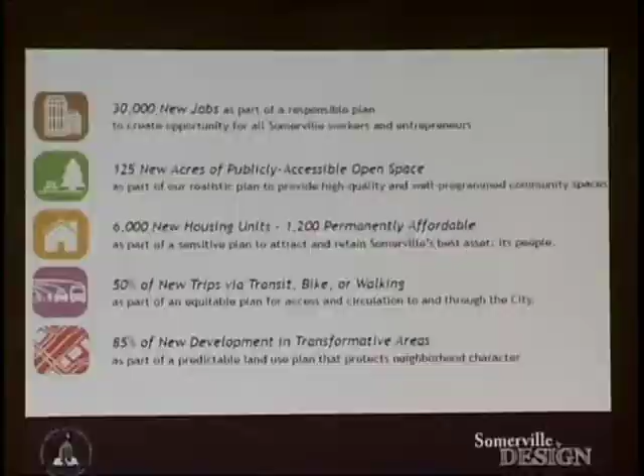And 85% of new development is in the transformative areas like Assembly Square, Inner Belt, Brick Bottom, and Boynton Yards. The rest of it being enhanced in places like Broadway, all while making sure that we limit or end the strategy of squeezing infill development in amongst two-family houses in a way that is probably inconsistent with the neighborhood character.

All of this strategy is something we're working towards submitting in a citywide zoning overhaul, the draft of which will be released this fall. But in addition to that, that draft is based on a lot of the current mapping strategies and the current design strategies.

As we do these neighborhood plans, we learn and we improve that draft, and we say the community wanted development here but didn't want development there, and we can make some of those changes as we go. So this is designed to be a very interactive process.

We started with the vision meeting, which was September 29th here in this room. Had a pretty good crowd of folks who came out and proposed some suggested ideas for what was important to them. We then moved into 328 Broadway, which is our design studio, a vacant storefront in Winter Hill. Spent 3 days there, held a series of meetings, walked around, toured around the neighborhood with the design team so they could get to know what was what.

Parked the art bus out front just because it's fun to do. And now we're working towards providing a plan with the items in it like this Gilman Square plan, public feedback, local stories. We get all these pieces together. At the end of the day, it also includes, as I said, that zoning strategy.

Russ, you want to take it from here? So I'm going to hand it over to Russ Preston, who has been our lead designer on this team. He's going to walk you through the rest of this process with the folks here. We're going to have a little introductory piece done by our economic development team, and then move into the designs.

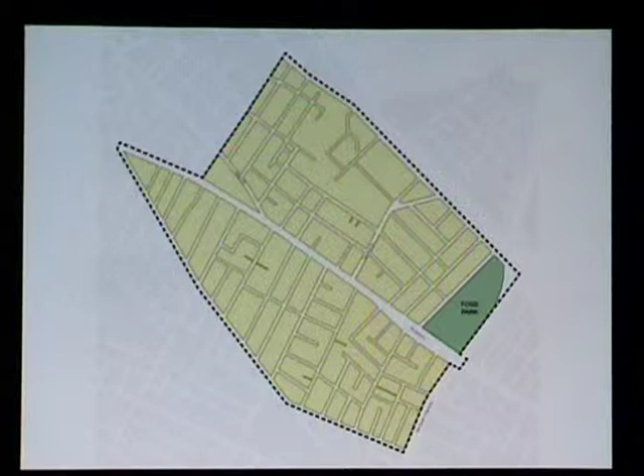Evening, everyone. Thanks for participating in the Winter Hill by Design process here, our design charrette the last couple of days. Big thank you to all the team members too. We've been running around all day trying to get these drawings and ideas out for you. Really appreciate all the last minute effort here to get these boards over and get this presentation together so we can share with you these ideas we've gathered the last couple of days.

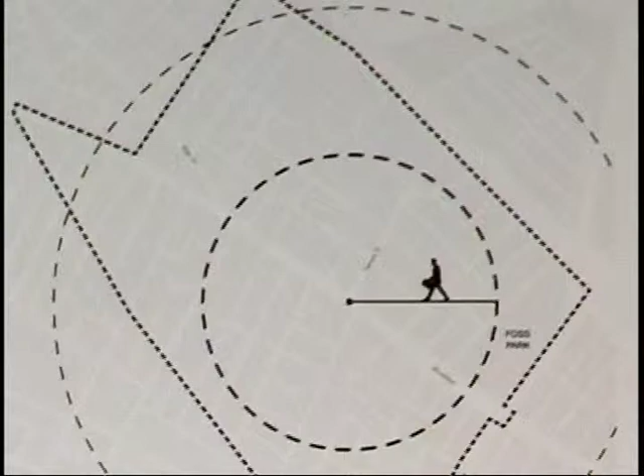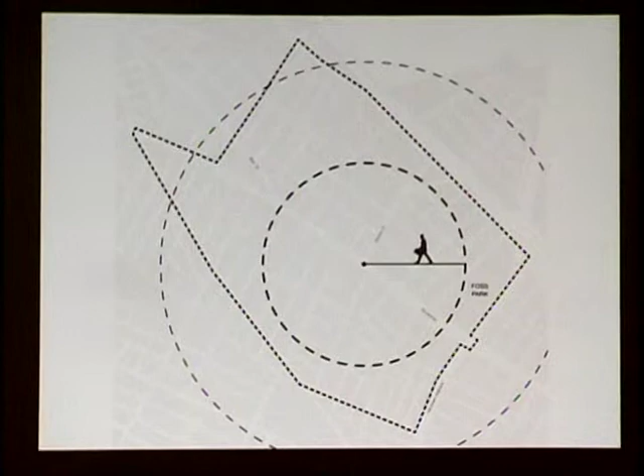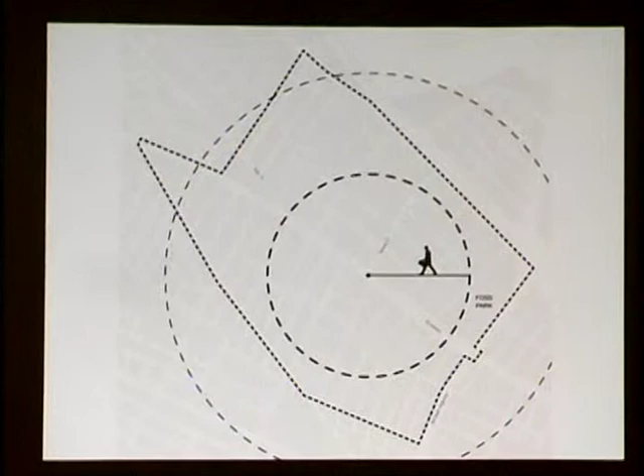So just to orient ourselves, this is Winter Hill at a 5-minute walk. We've kind of put that 5-minute walk at the center, which we heard over the last few days of this process is more or less at Temple and Broadway, the 100% corner. So we'll talk a little bit about that 5-minute walk and what the implications of that are in the neighborhood.

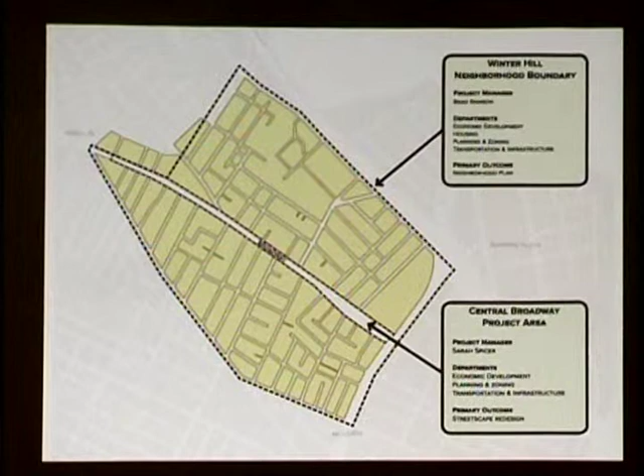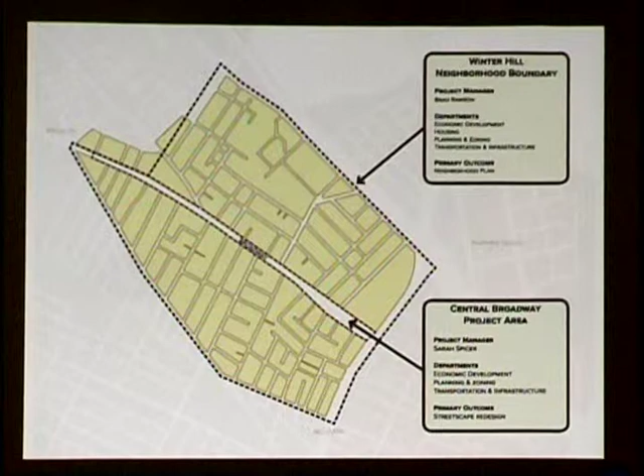So there's two processes running at the same time. This is the neighborhood plan, but there's also the Central Broadway project area. And we've looked at those three concepts over the last few days with the input we were taking in, and have a few ideas that we're going to share now in the context of the neighborhood plan. So I don't want to confuse this, but there are two processes going on that will hopefully inform each other as we move forward.

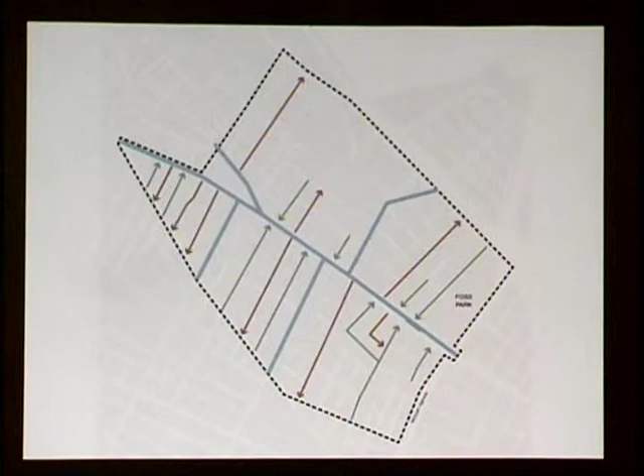So looking at the one-way and two-way street system, it's just to orient ourselves around Broadway. And we know there's a lot of traffic issues around Broadway, a lot of congestion that we've heard over the course of the by design process so far. Broadway's got a lot of one-way streets and a lot of streets coming into it, and that sets up an issue of a lot of turning movements that we can talk about further.

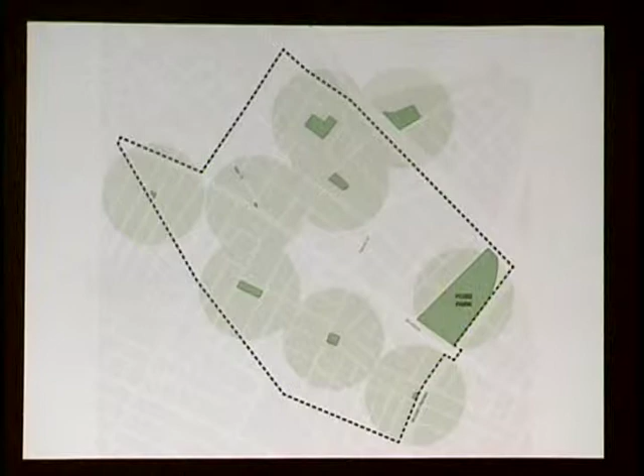What we heard a lot also was that there's a lack of open space in the neighborhood. So this is the existing open space in Winter Hill, Foss Park being kind of the most visible landmark. And we've also found some opportunities for new open space that we can talk about in more detail, most notably a new neighborhood square or green space at the corner of Temple and Broadway, and then some other pocket parks and plazas that might have an opportunity to make it into the neighborhood. You can see that quickly fills in that gap, so we liked where those parks showed up.

So from an economic development standpoint, I want to hand it over to Ed and Glenn to sort of set the stage here about how Winter Hill fits into the larger economy of the metro area.

Thank you, Russ. I'm Ed. This is Glenn. We're with Urban Advisors. One of the things we wanted to mention when we started is that our mission here is really about finding ways to make a much better business environment and make things work better for the residents who are around this area who would like to see more retail and services and a more walkable street.

Okay, I'm technically challenged here. One of the major things that the city has in transforming itself, and a challenge at the same time, is this housing pressure. Anywhere, according to these projections, from 4,400 to 6,500 to 9,000 units, depending on which set of numbers you look at.

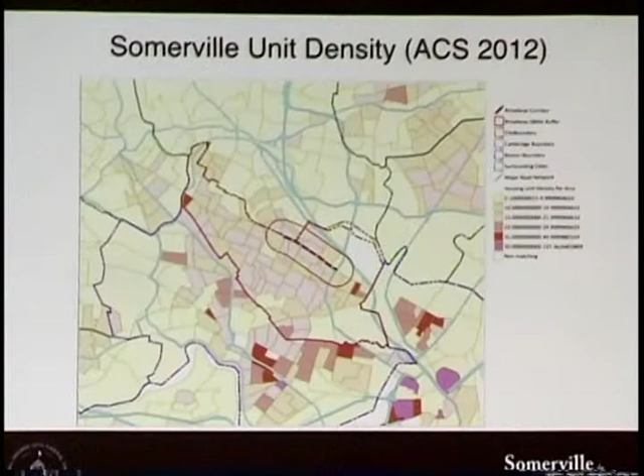You already are kind of dense, and you don't have much in the way of vacancy. So what this means - and there's nothing wrong with your incomes here, they're rising - essentially this means that housing pressure means you're going to have to be careful about where you put that stuff, because you have a neighborhood set of goals that says you're not going to start ruining the character of your neighborhoods to end up with putting in 9,000 units.

And why is that? Well, there are some great dedicated hardworking merchants on Broadway, but at the same time, the area has had a lot of disinvestment, and the retail is scattered, and it's basically not a retail district, as some of the other areas in the city are. It's a traffic pass-through, and it operates that way.

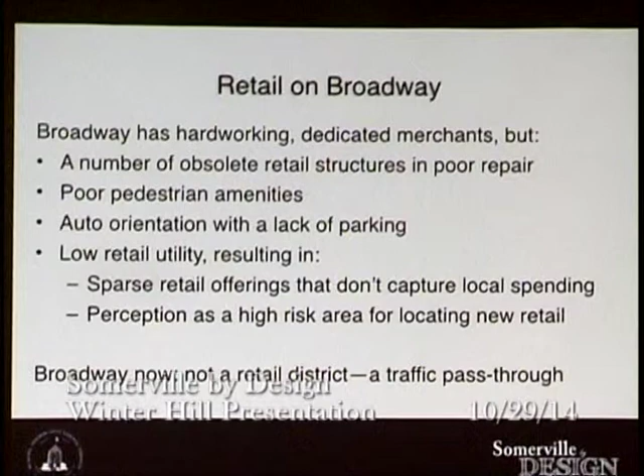So what that means is that when we're talking about a strategy, there are things you can do to help the local businesses, but one of the major things when you have this housing crunch is that you're going to have to find a place to put those units. That means when you look at redevelopment on this strip, you have to maximize the efficiency of land use. And that means you also have to create an urban framework that enables that, and that is what will enable you to lower the risk and the perception of risk for retailers who would like to move there, because the risk is not in the income, it's in the perception of disinvestment.

That residential demand gives the city a lever to get what you want. It's not even a matter of negotiating - the developers want to do the residential, they're crying out to do it here. So you can bargain for the kinds of things that will make your neighborhood better, like the retail space and the affordable housing.

And allowing the developers to have this higher residential intensity means that you're also adding people right on the street there who will be walking around every day on that piece of street. They'll be there at night walking. You'll start filling in those gaps. The appearance of disinvestment will change, and then the perceptions will change, and you will find that retailers will believe that there is a lower risk of them going there.

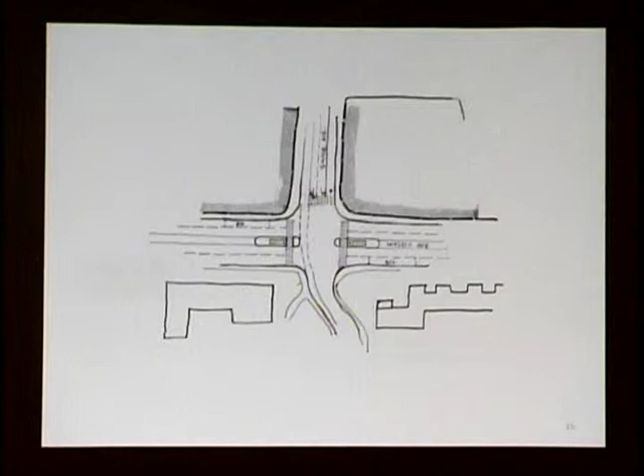So the next issue on Mystic is what do we do with all of this empty space? It's kind of a no man's land, not interesting to walk past. An early idea was, can we somehow buffer the highway with a large wall? How do we actually make the highway not be there, and how does that affect the neighborhood?

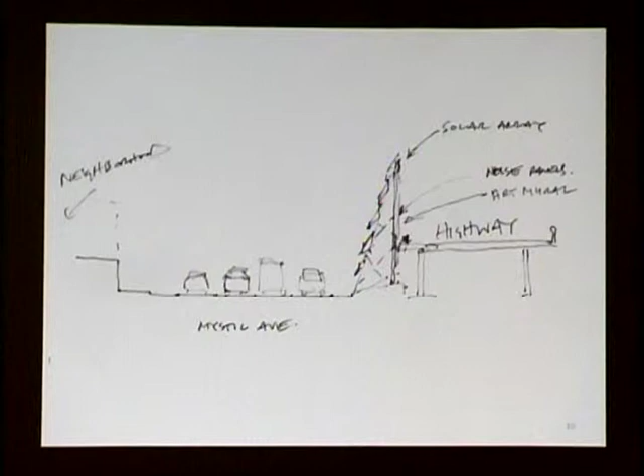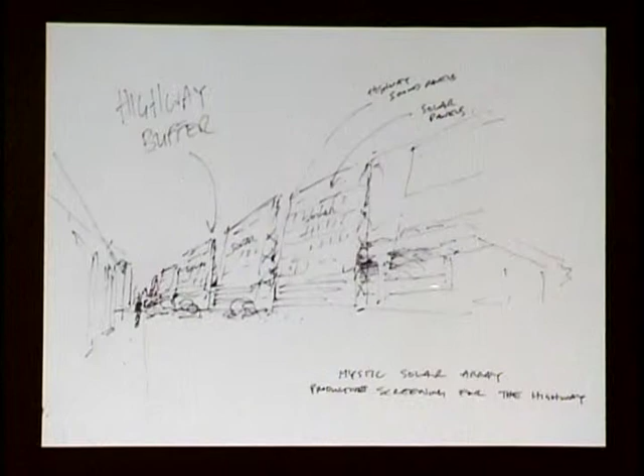A crazy idea was we actually line the wall with solar panels, making it Somerville's largest solar array. This faces south and could power a lot of industrial or fabrication uses that go under the highway. That was a wild idea we want your feedback on.

But getting more into the nuts and bolts of it - coming out from the 93 off ramp onto Mystic, there's a way we could neck this down and make this much more pleasing, slowing cars down so that the back and forth of pedestrians is improved. And then also, what happens underneath the highway?

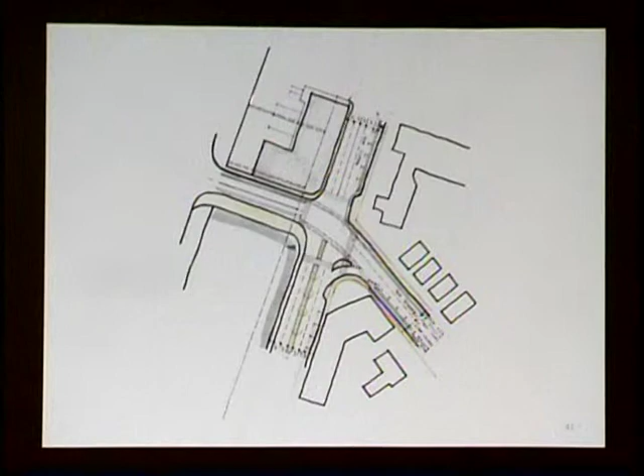This is showing a sort of Butler building, a warehouse type building under the trestles of the overpass, with loading and parking behind, screened from the neighborhood on the north. That will look something like this. You could get a whole lot of fabrication space, sort of overflow space from Artisan Asylum, and this could really become a maker avenue along Mystic under the highway, making this more of a place and less of an auto-dominated area.

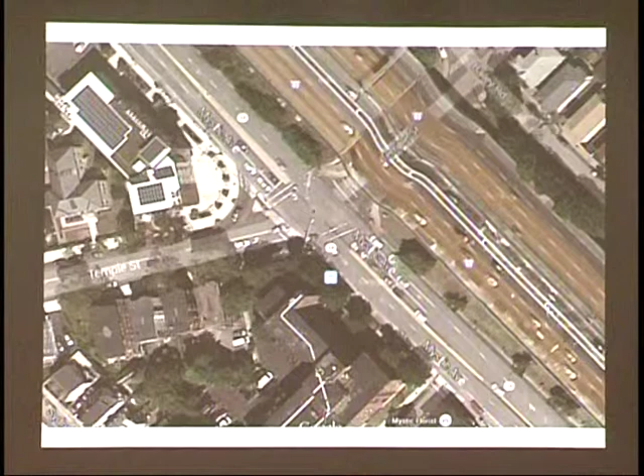Our next study area is Temple Street, moving up the hill. We've talked about this intersection and the connection across, but we wanted to look at Temple Street as a corridor, potentially a bikeway or greenway coming up from Ten Hills and the river into the neighborhood. This is it today - it has some large travel lanes, and travel speeds we noticed were higher than normal, so there was some potential there.

Here it is as it comes into Broadway and the 100% corner. Some quick sketches we did showed you could actually fit two bike lanes and two full parking lanes, plus two travel lanes along that, so we could bring in bicycle facilities very easily within the existing curb to curb.

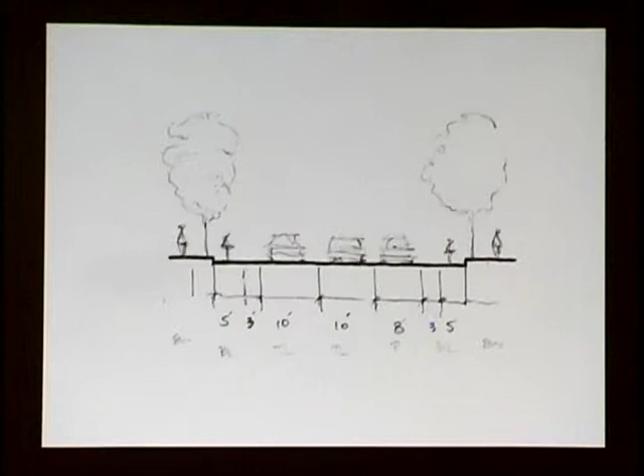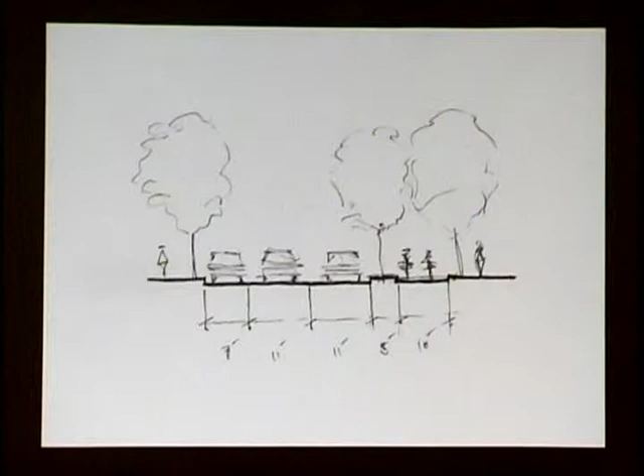This is another version of that with a turning lane in the center. And then a third version which puts a cycle track on one side - a two-way cycle track, protected - that would come down the whole street here.

Another thing we noticed is there's a lot of opportunity here to celebrate this church with a new public space. On the open space map, this was a location to really enhance this area and slow the cars down along this turn. You can see the bicycle facilities come in, and we've enlarged this plaza in front of the church, making it more inviting for pedestrians to come in and enjoy.

So moving back around the neighborhood to Foss Park, sort of the other connection to Mystic up to Broadway.

You've seen the images, this park has evolved over time, and there's been a lot of discussion about what needs to happen there. Our recommendation is that this needs to be further studied—what's the programming, what are the activities and uses that go there. But early on we've got a lot of consensus about where the fields are located, and how Broadway meets the park, and how this edge interacts with McGrath Highway. So we've looked at those to kind of kickstart the thinking around what happens to Foss Park.

A big move here I want to point out right away is this connection across to the supermarket area, really strengthening that intersection for pedestrians. We've also moved some of the sports facilities down and put an amphitheater that can berm up along the highway, plus other facilities programming farmers markets, community gardens, and the like.

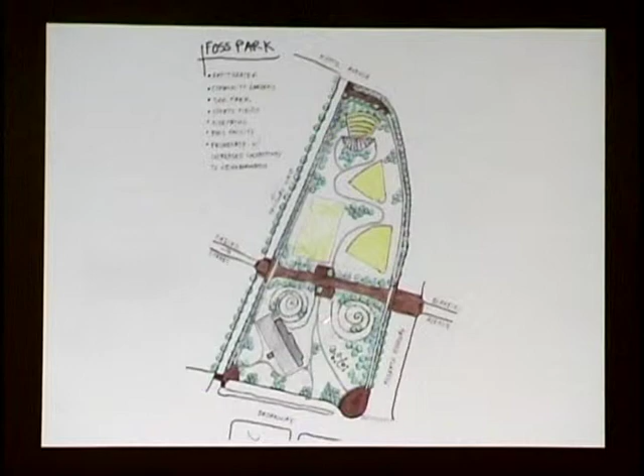Another alternative is really berming up along the highway to shield the noise, air quality, and increase the overall friendliness of the park, pulling that down along the edge of McGrath. This opens up the opportunity for a much larger amphitheater, performance-type place, soccer field, and possibly putting the pond back into the park. That pushes the ball fields and other sports facilities, tennis courts and basketball courts, down closer to the pool.

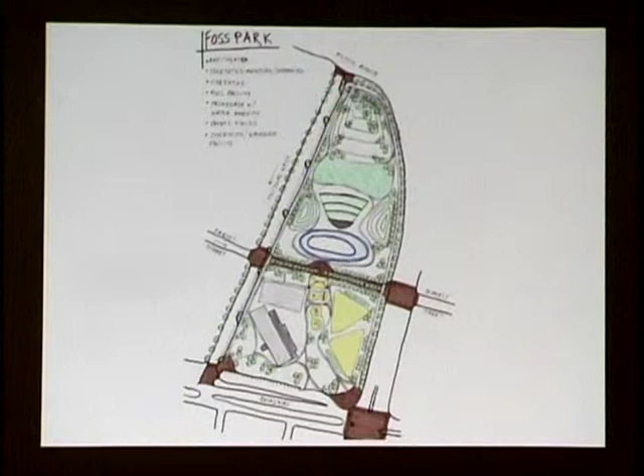So this brings us to the edge of Broadway, and this intersection is really a mess right now. There's a lot of leftover pavement, a lot of leftover pedestrian space that's not being programmed—it's all empty space that's just there. And then this parking facility, we thought, okay, is there a better way we can organize all of this land?

So we looked at building on it, programming it with new buildings. This could be a new YMCA, a new mixed-use building, really creating a gateway into Winter Hill that meets Foss Park, improving the connection from the park over to the neighborhood. And this is a redevelopment here, mixed use as well.

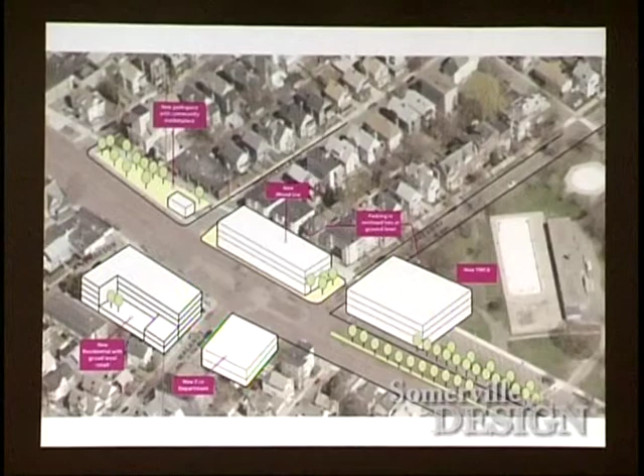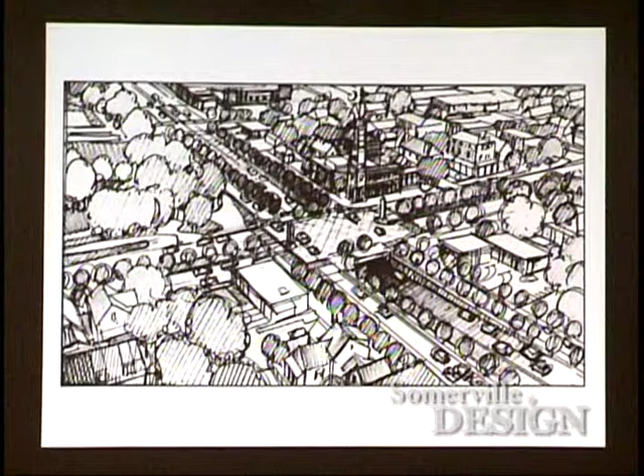Further details here: there's an interesting corridor connection to McGrath, and this whole line of boulevard—what do we do with that? We looked at a couple different versions. An idea that came up when we were planning East Somerville was actually trenching out McGrath, pushing it down, and then pulling across Broadway with a deck on top of McGrath. This would create a gateway plaza for local traffic on Broadway and getting onto McGrath, really tying the two neighborhoods together and making access to Foss Park and over to East Somerville's Main Street and the grocery store area much easier. So we want to reintroduce that idea here because we think it would really benefit East Somerville.

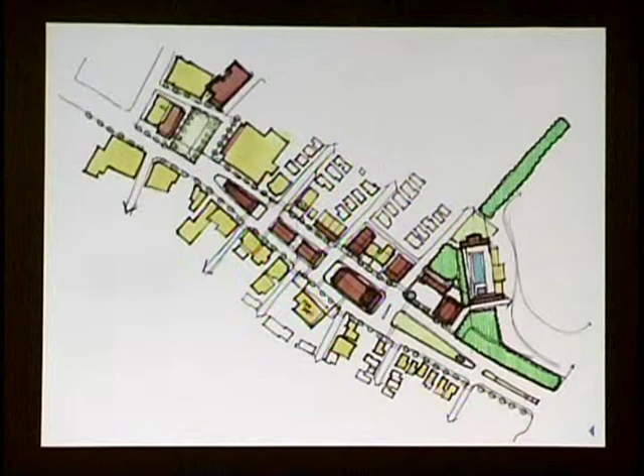On the more radical side of the plan, we thought, building on these redevelopment areas that might happen on the corner of the park, could we use some of this land in the wide section of Broadway to create more development pads or more public building facilities such as market buildings? So that's pulling this up and creating really a two-sided street—two-sided blocks, one way in this direction and one way in that direction. That would allow cars to travel slower and really extend that Main Street feel in Broadway in Winter Hill.

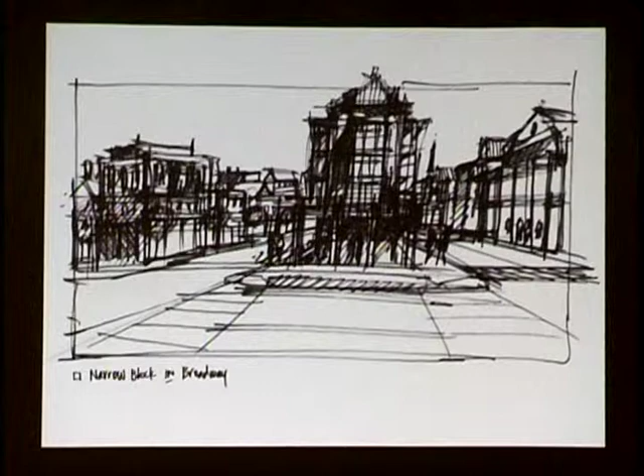This is another version of that in more detail, and we can talk more about the architecture ideas here if you'd like. This is a very quick sketch representing a flat iron building in the center of Broadway, with Broadway going up the hill and down the hill on each side.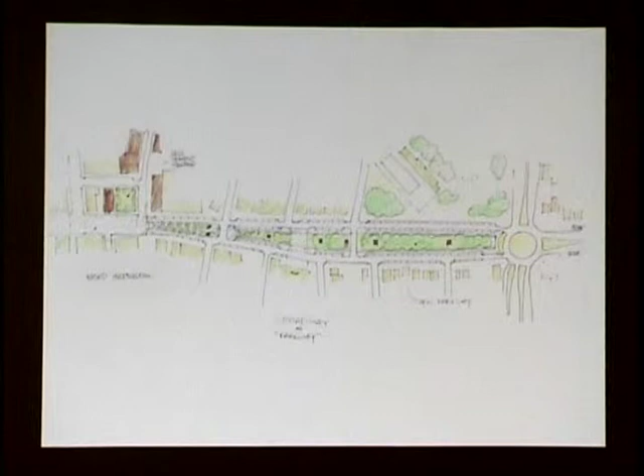So this is another iteration of that YMCA building with several other development sites, and this is sort of a pared down version of the building in the center of the street. And then another iteration of a field house building with possibly an indoor pool for the YMCA, and then a sort of remnant of that large green space.

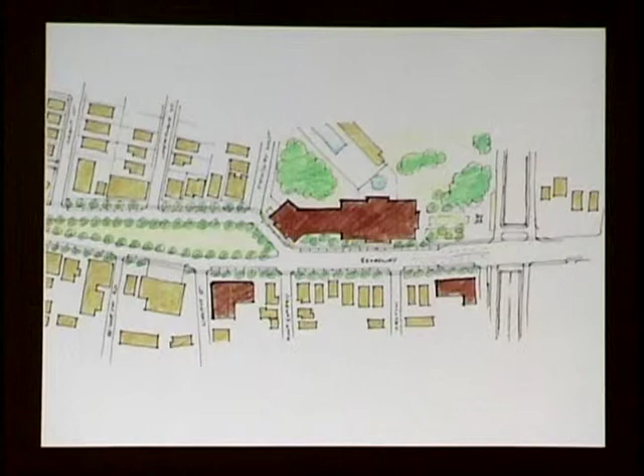And this is just necking down. This would still be 4 lanes, turning lanes, bike lanes, and parking, so there's still quite a bit of right-of-way in this version. And this is an alternative where we've actually shifted that building in the street to all of the sort of leftover islands and parking area in front of those existing homes and businesses. So this could be a really nice mixed-use sort of outdoor seating, sort of promenade leading into the park.

So concept 2 has been the preferred design coming out of the process to date for the streetscape. And there's really 3 sections to this design: west of the main Broadway intersection, Broadway to sort of Temple Street, and then down towards Temple to McGrath. Those are the 3 sort of chunks that we've explored.

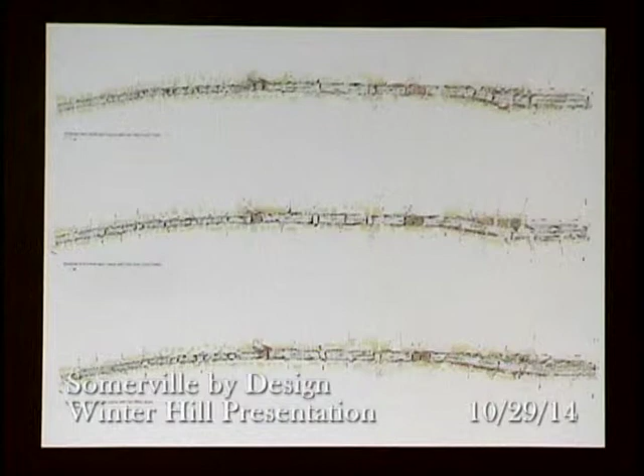But a few things I want to point out. Looking at the report that came along with those studies, there's a couple of quotes. All of them have the same amount of space for automobiles, and we just wanted to bring that back up and question that assumption. Should we have less space for automobiles and more space for people? Or on the other side of that coin, should we have more space for automobiles and less space for people?

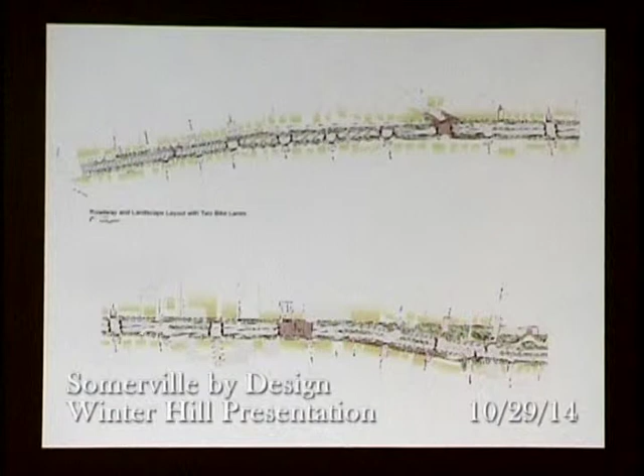And we thought that needs to be discussed in the context of the larger vision for the neighborhood. This is concept 2, which you can see at the intersection of Temple and the intersection of Main there. But really what we started to look at were the details of what happens along Broadway. In this plan, a few things poked out: some of the medians are being taken out, so we're losing trees, and some of the sidewalks we started to question.

So then we dug more into the report, and we discovered that this concept might be the preferred one, but it actually has the narrowest sidewalks for pedestrians. So we thought we needed to revisit that and say, is that really the vision for Winter Hill, or is that in conflict with it?

So this gets us to a more holistic understanding of how the neighborhood functions from a transportation or mobility standpoint. Do we want to prioritize pedestrians, or do we want to have the car be the priority? We should discuss that further with everyone this evening, looking at it from a network approach.

So this is Winter Hill's sort of people-oriented network right now. And you can see in the back of the room later that we have some major thoroughfares for bicycle facilities, and then the sort of minor networks, the more local neighborhood streets that could use minor facility improvements. These are the more sort of commuter corridors for bicycles. And then we've identified the nodes of destinations that bicyclists and walkers might use in this network, tying it back down to the river and to the Assembly Square T line as well.

So we need to think about Broadway's transportation improvements in the whole context of how people get around the neighborhood. And also very important is this Marshall Street connection from a pedestrian standpoint down to the future Gilman Square.

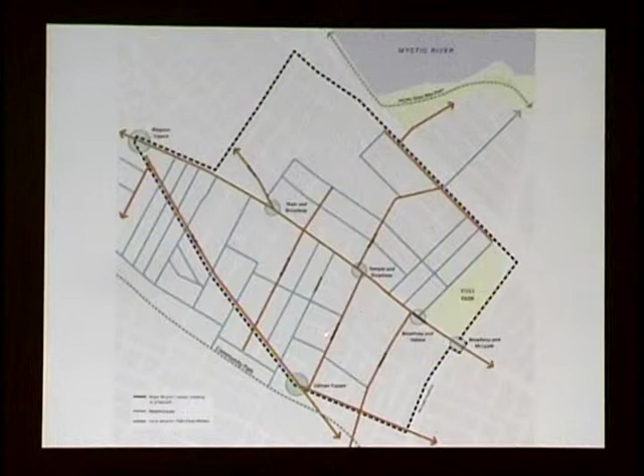That's actually a much quicker walk, and we envision that being a fairly high use area. The character of that street is going to change when the T goes in.

So just some quick background, Andrew, who will talk in a little bit about some short-term interventions, went out and shot some speeds. And surprisingly, the road doesn't perform that bad right now. The highest speed we clocked was only 41 miles per hour. But really, we want to get that number down to around 25 along the whole corridor to make it safe for pedestrians. From studies done on pedestrian fatalities, below 30, below 25, is really what we have to shoot for.

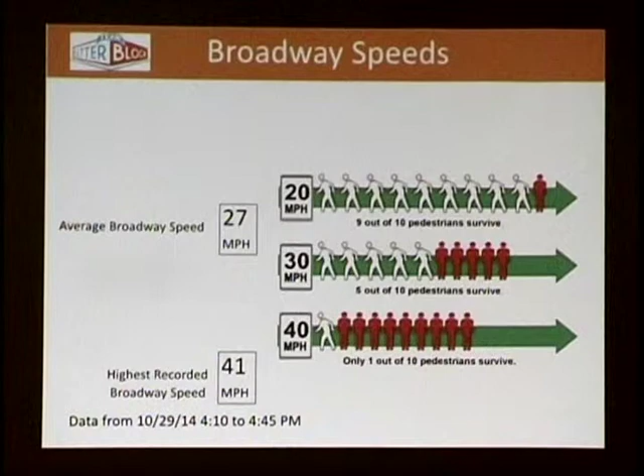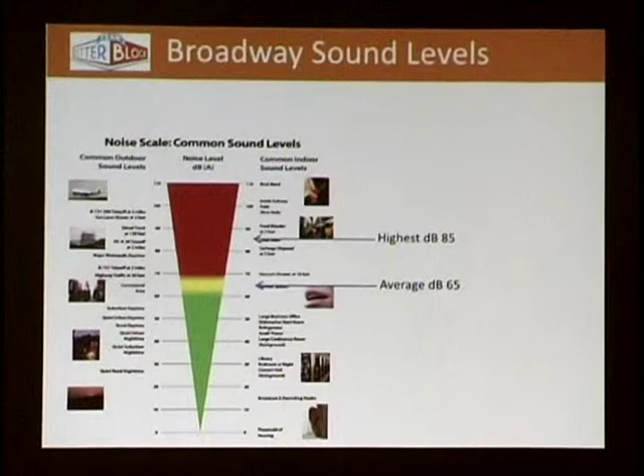Then there's noise, the ambient noise of the street, which is really important to making great places work. We measured that, and you can see it's tolerable, but then as a bus goes by, some trucks go by, it gets up into the uncomfortable area. So we have to figure out ways, with street trees and other types of street furniture, to bring that down and lower the speeds of the cars.

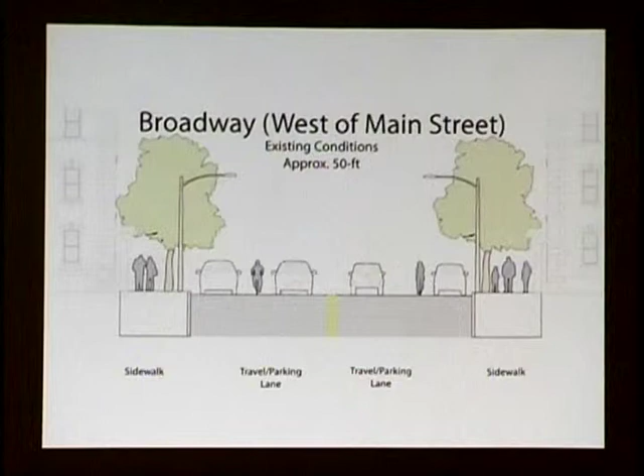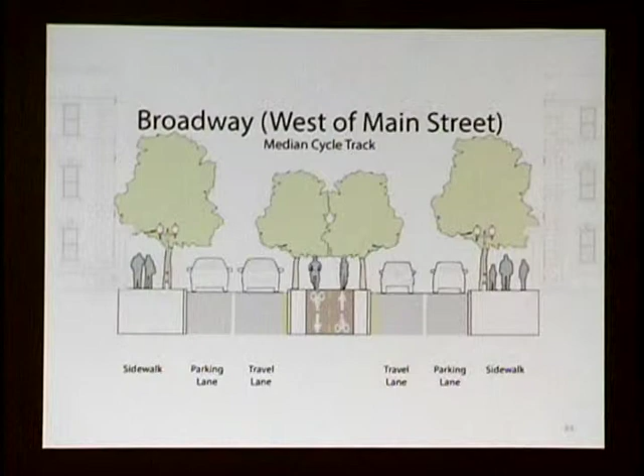A new idea for that is that possibly we have a median down the center that involves a cycle track, which keeps the historic character of that avenue of Broadway intact. Or we put the facilities on both sides for the bikes. This is still keeping a relatively large sidewalk for cafe seating or outdoor activities, and then goes down to a two-lane profile with two parking lanes.

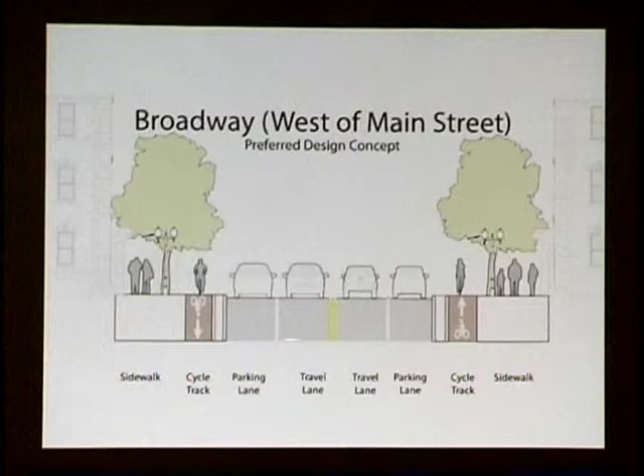Then on the other section of the street, Broadway from Temple down to Foss Park, is really a commercial Main Street section. This is the most intact potential for a two-sided commercial Main Street in the district. The existing conditions look a lot like this.

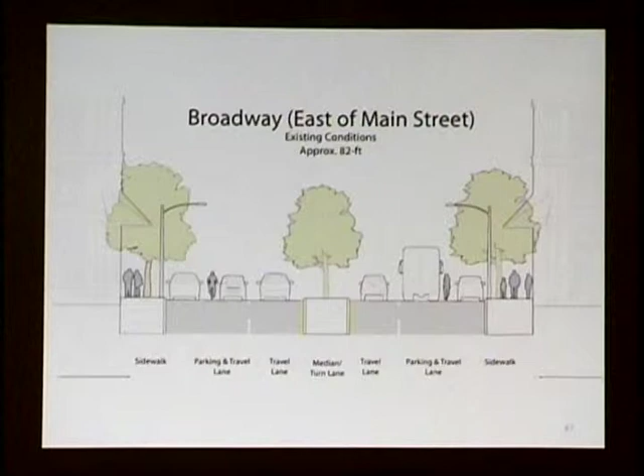The current streetscape option two narrows the sidewalks in areas to put in the bicycle facility, and then adds a turning lane to a number of the blocks. So we're going to lose a lot of trees in the center for that.

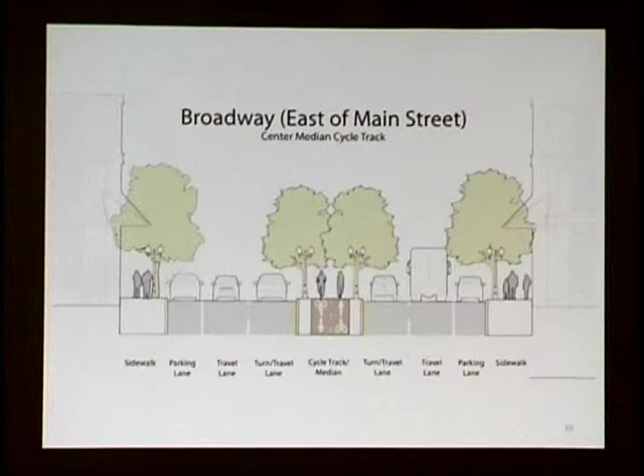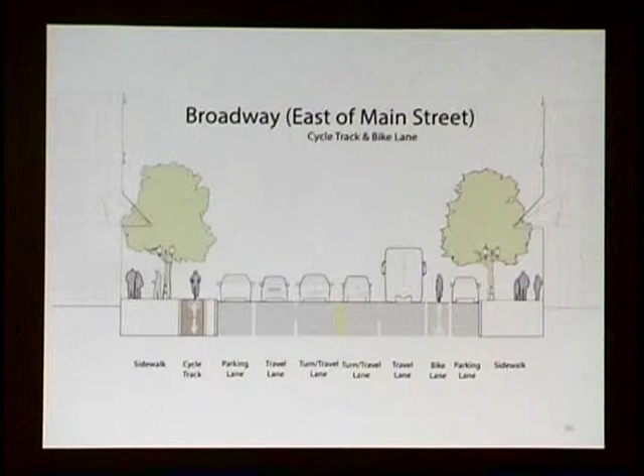So we thought, okay, what other options are there? We could continue that center median with the cycle track as an option, or we could put, going uphill, a facility on the street—going downhill—and going uphill, where bikes are moving slower and might need to rest or get off, have a grade-separated cycle track as an option. And as we go down more towards Foss Park, we have all of this extra land where Broadway sort of fans out.

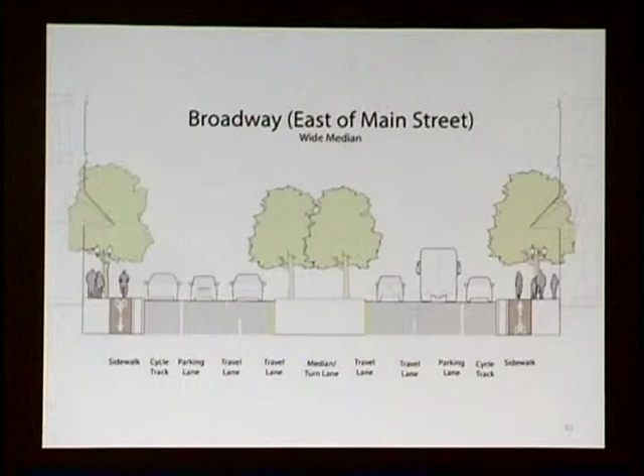This is looking at keeping the bicycles on each side and providing a large, potentially green space or common area in the center of Broadway.

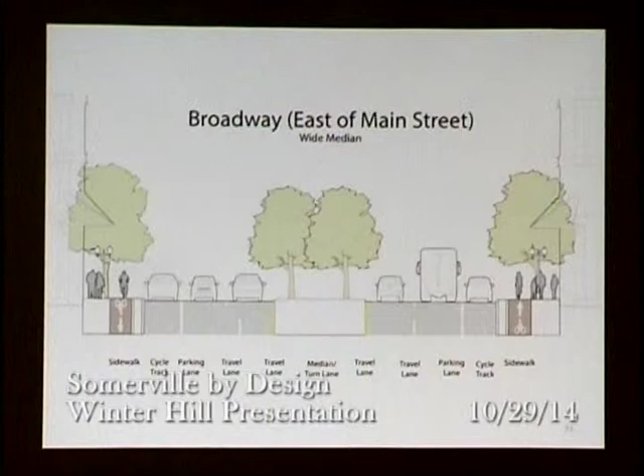Just some quick thoughts—there are some concepts in this streetscape design right now, but really this is the intersection of Main and Broadway, and thinking about it as a plaza for this end of the commercial node along Broadway. Maybe this is a raised speed table with interesting pavers that come across, so it really feels like a place where pedestrians can cross comfortably and cars slow down to exist within the context of that little place.

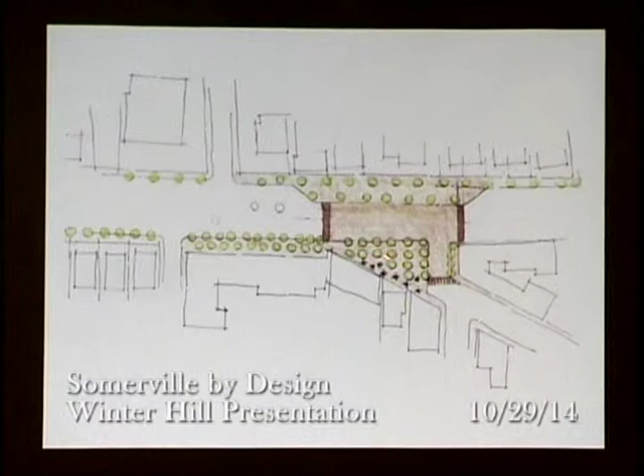Just a note, this also thinks about relocating that park. It's Somerville's smallest park right now, but not many people are using it. It's really more of a visual amenity to the neighborhood than much else, so is there a way we could reincorporate that into this design?

Moving further down Broadway, something to note: this is the 4.5 block node around Temple Street, and we wanted to really understand what was going on there—where the buildings meet the street, and how that outdoor room is functioning today. So this is the study area looking at the frontage.

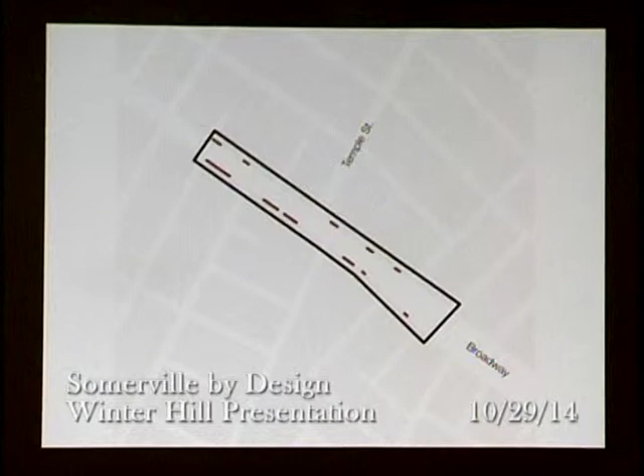How do the buildings interface with the horizontal areas of the street? We realized right away that there's a lot of curb cuts—this is the amount of frontage devoted to cars getting on and off the sidewalk. That creates a kind of hostile environment for pedestrians and cyclists right off the bat. Actually, 16% of the sidewalk—so 16% of your stroll is spent looking out for cars along those sidewalks.

37% of the frontage is actually devoted to just cars. That's an important thing. For retail streets, they become very boring very quickly for folks, especially if you're walking past parking lots. So this isn't healthy for the existing businesses in the neighborhood.

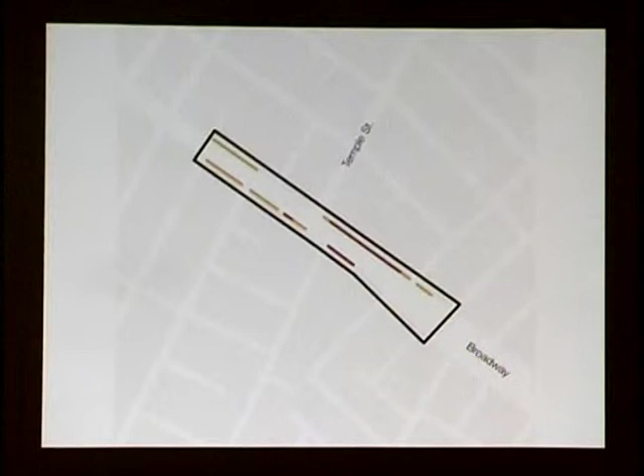So then we rated all of the facades, all the storefronts, from a 1 being the best to a 5 being the worst, and looked at the gradient of quality of storefronts along this stretch. You can see that 41% of the frontage is the lowest 2 levels of rating. So there's a lot of improvement needed with the existing storefronts as is.

This leads us to a redevelopment area around Broadway. You can see here there's some opportunity sites. We've already talked about the maker space, the fabrication space that could happen over near Mystic and the highway. But we also want to talk about the opportunity at the corner of McGrath, the opportunity with the existing gas station next to the fire station, and really the core of redevelopment potential along the intersection of Temple, Marshall, and Broadway. This being the Star Market site, this being the Walgreens site.

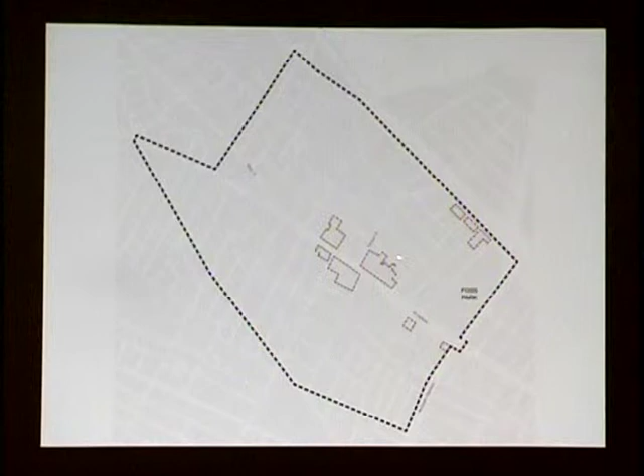So let's talk about Walgreens first. It's a suburban style retail building in a walkable neighborhood, so it's the wrong type of animal for this ecosystem. This just screams drive fast, I want to see you, I want to pull into Walgreens when I'm going 55 miles per hour. It just gives all the visual cues that you're in the suburbs and you should be in your car.

So as a redevelopment site, we looked at this building and a number of these other very handsome apartment style buildings along Broadway as the cue for what might happen here.

Here's the beginning of our explorations into this: actually knitting in a small street or pedestrian way to connect to the residential street. That's something about this neighborhood—Winter Hill has a lot of long blocks. So we looked at how we can make a finer grained network for folks to choose to walk through the neighborhood. This has apartment buildings, mixed-use apartment buildings on the front, and then a series of townhouses coming back to meet the residential street with parking below and decked above.

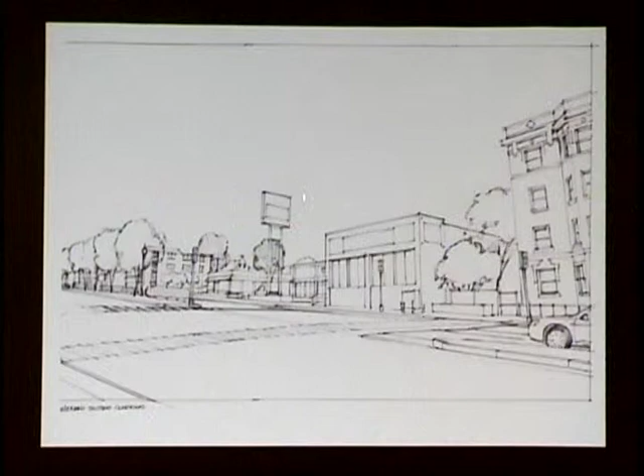These are some other options for how those townhouses might meet the residential street behind. This is existing today, the lovely freeway signage. And then this might be an idea of what it could develop into as a mixed-use apartment-style building.

And this is 2 buildings really—the second one is pushed back to meet, there's a little paper street here that could create a nice little plaza or pocket park here, giving some more public space to the neighborhood.

And then this is a different version that has some more height to it. Looking at whether there's really much difference between the number of floors on this redevelopment, the hill, the context to the existing tall historic buildings—we don't think there are.

So stepping back down to Broadway, the 300 block of Broadway—this is the post office here. We wanted to say, well, this is a lot of car-oriented frontage that exists in this block between School and Marshall. What can we do about that? And how can this incrementally develop or be a piece of a larger redevelopment strategy?

So one idea is that it's an incremental approach. This is actually the space where the charrette was held—this is the existing apartment building. We looked at bringing Bradford, which is now a dead end, through to connect to Marshall, providing some real frontage and some infill potential here for residential, servicing all of these buildings along Broadway from the rear, and really reestablishing this as a place for people.

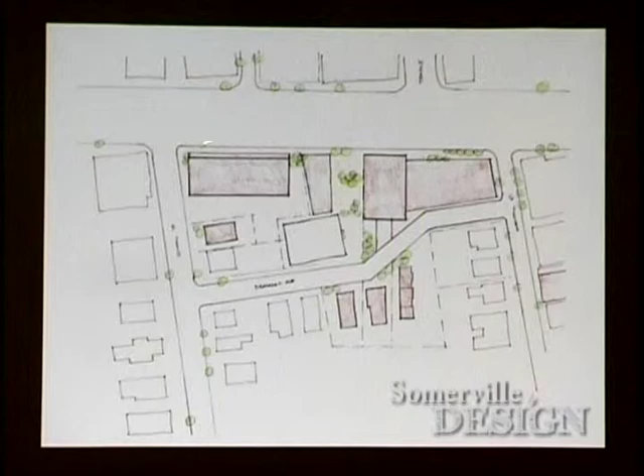You can see this is a quick redevelopment of our charrette building—what it would look like with retail on the first floor, and then how the rest of the block would build out, with a mixed-use building here, a more intense commercial building on the corner, and then a mixed-use building with potential smaller three-family or townhouse-style infill behind, to mesh well with the existing neighborhood.

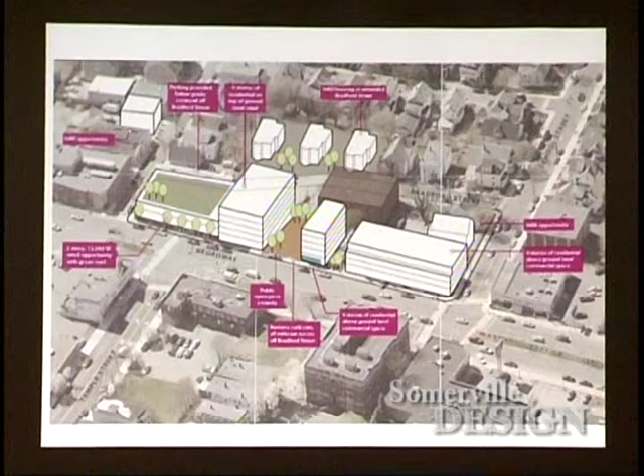So then across the street, kitty corner, we have the Star Market site. What do we do with the Star Market site? So existing conditions today, you can see this is the other bulk of our auto-oriented frontage along Broadway.

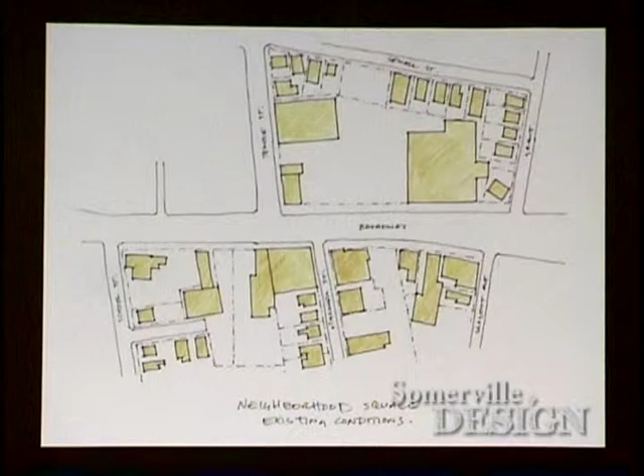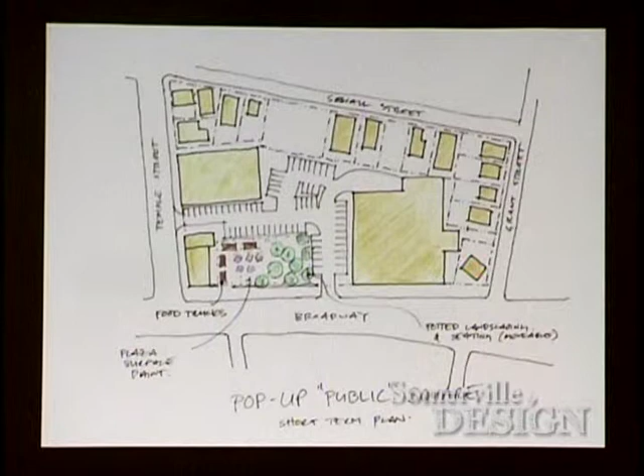But we think really quickly, using paint and potted plants and food trucks and umbrellas, this could become Winter Hill Plaza, Winter Hill Square. This could just be a weekly occurrence of a food truck rally, with some potted plants, something seasonal or programmed into the parking lot. This is happening in cities all over the country and world, where these temporary or temporal public spaces are being created. This is really looking at how we can keep these surface parking lots as efficient as possible and not displace the parking that's there with this public space—so these two uses can coexist together.

And then at this point, this introduces the idea of tactical urbanism, the lighter, quicker, cheaper approach to how we can improve our neighborhoods in days, not years. I'd like Andrew to come up from Team Better Block to take us through some other ideas on this topic.

Thanks, Russ. So you're walking around your neighborhood and you're like, oh, I wish I could just move that curb a little bit, or I could paint a bike lane here. That's my job, I get to go do that in places. So I walked around Winter Hill, rode my bike around a bit, and took some of the ideas we'd done in other cities about these temporary places that can get the market going a bit, and maybe test out some of the designs you've seen today in a temporary fashion. Not permanent, not that it's going down forever, but you can get out there and try some things and see if that works in Somerville and how you want to use it in your neighborhood.

Just a couple ideas. One of them, I love Medford Street. I rode my bike over there, and it reminded me of a street back home where we have festivals and string lights. It's so simple, but it makes this intimate area. We close the street for street festivals there, and program them with things for kids to do, things for adults to do, and we even celebrate local stories. I'm from Dallas, and the only thing cool we had was like Bonnie and Clyde or Lee Harvey Oswald. We actually had festivals with this and food, and it becomes part of the neighborhood identity, so you can use the existing infrastructure maybe just in a different way, and it doesn't take much.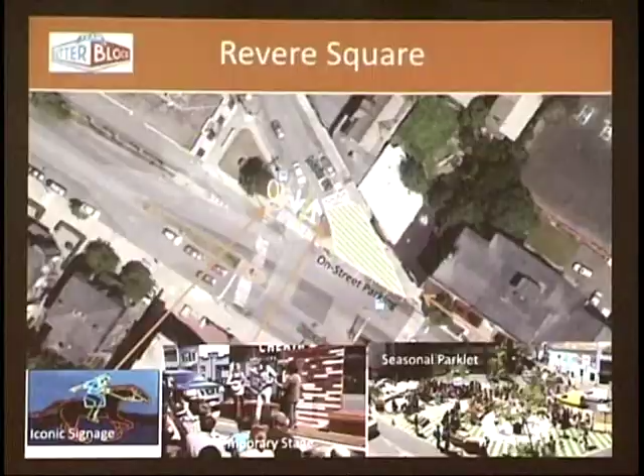I went to Honk Fest - my gosh, you got some talented folks in Somerville. One of my things when I was walking around on my walking audit, I saw when you go to Europe you just see those streets where stuff just kind of spills out from the retail or from the neighborhood or from the residential into the street. Well, a lot of times in America, we've regulated that out. We've said that's too messy, we want it clean. You definitely have clean sidewalks in Somerville. Get them a little more messy - it really creates some friction. I think it will allow those retail businesses to do a lot better as well.

So there's some really quick code changes that can happen here. A lot of these I think you have to go through your alderman now to get, and I'm recommending that you should allow staff to do that, and then on a complaint basis, go address it if someone is really abusing the right-of-way. But that's the fun stuff. I rode up and down Jaques Street and Heath, and as a bicyclist, I really didn't want to go back up the hill to go back over. So I think there's enough room there - you could do these bike boulevards and just allow bicycles to go contraflow.

And what that'll do is also slow those streets down a little bit. And especially for access to this school, getting kids to bike, that's a great way to do it. Mom can actually see kid go the right way on the street toward the school.

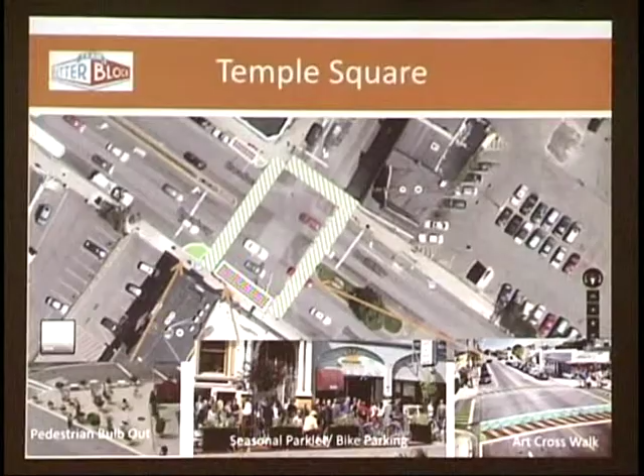Temple Square. We already saw the idea of how to create a little square over here. I think you could do it even with just some of the space that you have now, using paint, bollards, signage for little pedestrian bulb outs to make it easier to cross the street, and art crosswalks that really give the place an identity, a place you can call your local square, and then using seasonal parklets and bike parking in a location to expand the sidewalk, basically. So that's what can happen this weekend, if people are so moved.

But leading to some of the longer change ideas, this is the existing Star Market site. Just to orient everyone, this is Temple here and Marshall. So we did some really quick studies about how this might redevelop, and this is a fairly conventional mixed use plan, knitting the new street in, lining Broadway, with parking behind in the center of the block. That would really enhance Broadway.

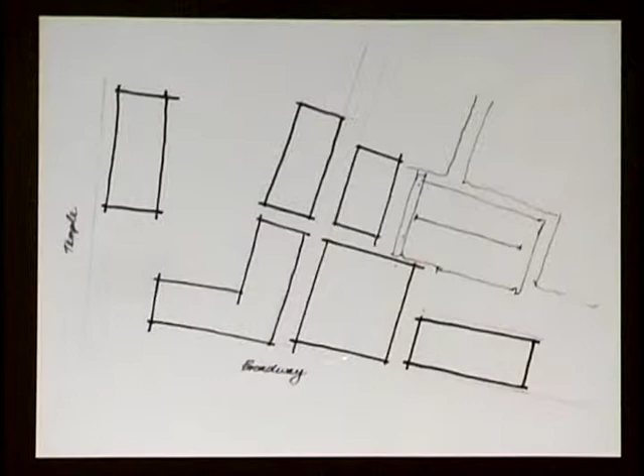It would put the parking behind. These are all good things. But we heard people want a square, and also, early on in the discussion, what about a market? So here's a small 35,000 square foot market building embedded in that redevelopment plan. But as Glenn and Ed shared with us, we're going to have to modify that vision.

This was a quick view of what that might feel like at the corner of Marshall and Broadway on the Star Market site. So then a finer grain approach: how do we actually knit in some more dense housing, some finer grain block structure, and have some courtyards to bring public space right off Broadway and more embedded in the block.

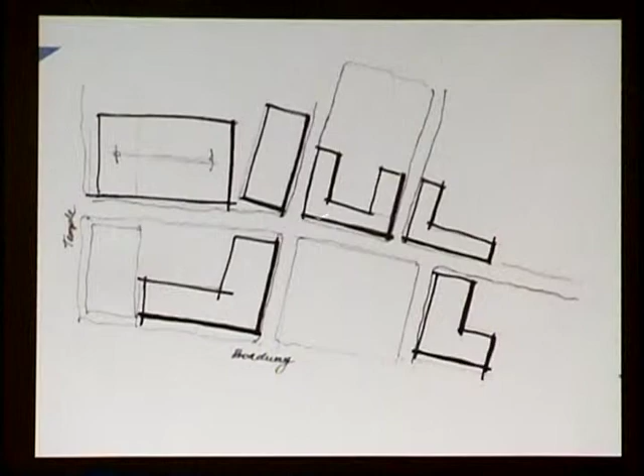And then this led to the idea of the attached green, essentially sitting in the parking lot of Star Market with new mixed-use buildings around it. This might be a view of a redevelopment of one of those streets in that plan.

And this led to the idea of how we can provide a block that Star Market could sit on or be redeveloped on, knitting this new street through, and providing a few options for travelers taking a right or left on Temple to get to Broadway or down to Temple. And then a new mixed-use building, or the Rite Aid building, could sit on this block.

This is the existing two buildings on the corner that remain, and then a new mixed-use building fronting on the square. We've been calling it Temple Square, but I think that name is still up for debate. And this is really important because where this is situated allows cars to still do this turning movement and protects the square.

It also, along Marshall Street, if you look at the plan for Gilman Square, we've created a new square down near the station that has a tower envisioned for it. And Marshall, the visual termination of Marshall, was something that bookends and would be a very nice feature. So when people come out of the T stop, they can look down Marshall and say, oh, there's something down there, and be drawn up the hill, marking this as a special place.

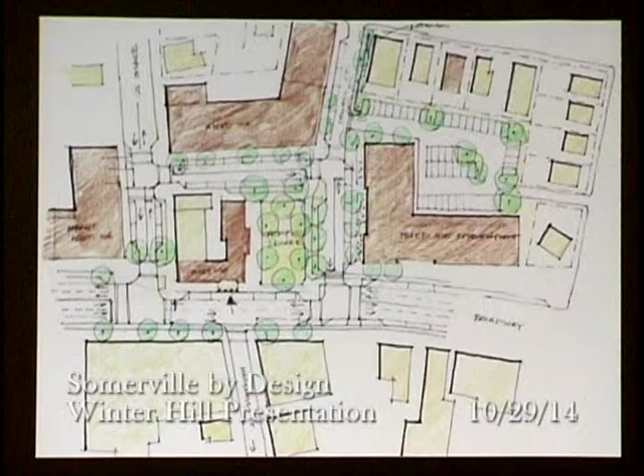This is a quick view up Marshall, developing this idea. Then the idea, well, how does this work from a traffic standpoint?

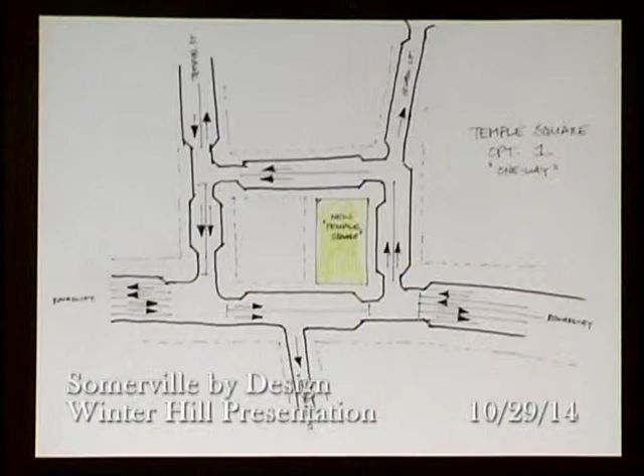We thought it might just function like a rotary, where these might actually just be stoplights or stop signs. We actually saw the other day from the studio during a power outage that the lights went black, and we noticed that people were still moving, things moved along. Then as soon as the lights came back on, there was a giant queue of cars. So the idea is that Broadway has a lot of traffic, but if it moves slower, it might function better.

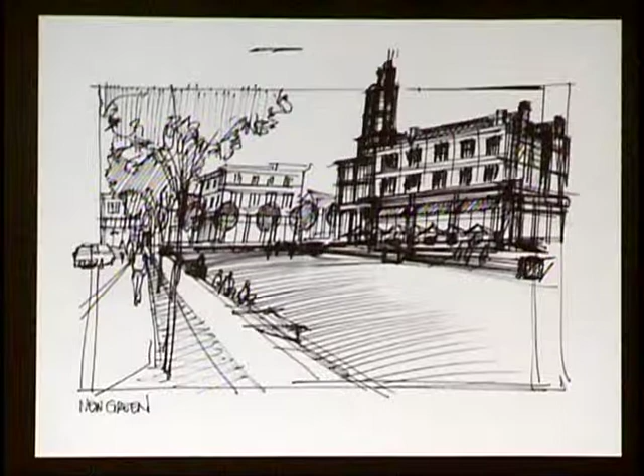And the idea that this is a two-way system, kind of like a courthouse square out in the Midwest. This is a view of that new square, looking back towards Marshall, and this is the gesture towards the square, the view up Marshall from Gilman Square.

Some of the feedback we heard early on was that we might really consider Broadway needs to have that commuter traffic flowing through it, and the idea of going around the square might be too much for the neighborhood to handle.

So this looks at really keeping 4 lanes coming through Broadway, and the square exists on the side of Broadway. This isn't great for pedestrians, there's still quite a bit of back and forth.

But this also provides the square, as the previous plan does, and this looks at some more intense redevelopment of these two sites based on some of the work that Glenn did.

So how do we park all this? Parking is always a big problem. We hear that a lot.

As a redevelopment plan, there are 2 options. We could have a district parking facility cut into the hill, under Stop and Shop, coming in off Sewall at grade and going into the ground, and then out on Grant using existing grades. So there's no ramping needed, or very little ramping needed.

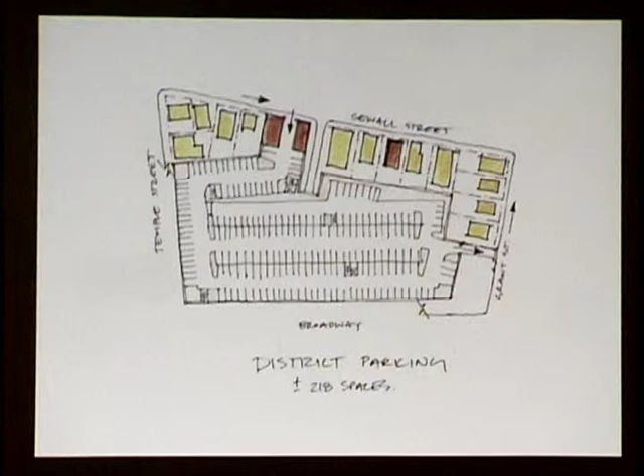That gets 220 to 250 cars. That would provide the parking and some public retail parking underneath this redevelopment. Ideally, it also has capacity for future development, possibly along the south side of Broadway, that might not be able to fit its own parking demand on the site.

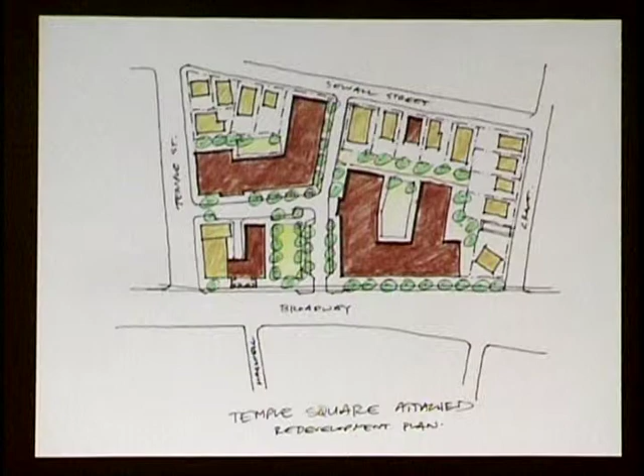And Winter Hill, we're looking at how to calibrate the parking demand for the buildings so that it meets the market as well as provides for a multimodal neighborhood.

Another option was, what happens if people want a larger square? This is expanding that square, removing the buildings at the corner, so you actually get a full view of the square at Temple.

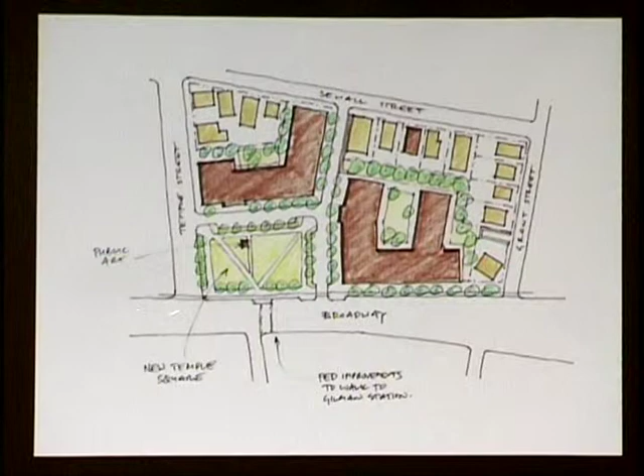And as an alternative, what if that doesn't happen, what if Star Market, something else happens with Star Market? Here's an option where there could be a new square at the corner of Marshall and Broadway in conjunction with the redevelopment of the 300 block. So that might be another alternative for Winter Hill Square.